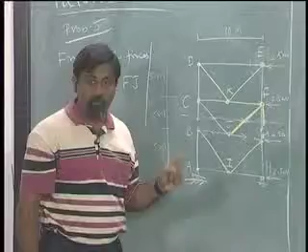So, let us try and do that. Okay, so I am going to draw this separately now.

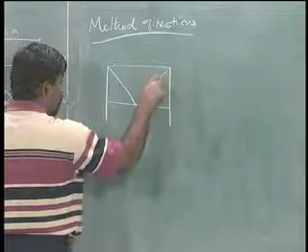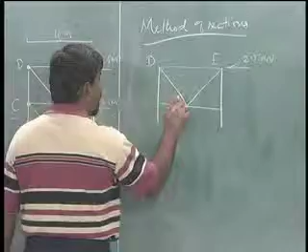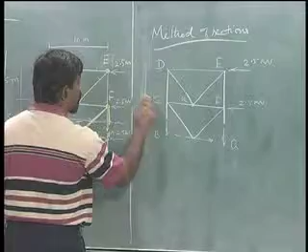This is D and E, there is a force here which is 2.5 kilonewton. This is C, K and F, this is 2.5 kilonewton. This is intact, but cut here and cut here. So there is one force here, one force like this. This point is B and this point is G. So, I have this is 5 meters, 5 meters, this is 10 meters.

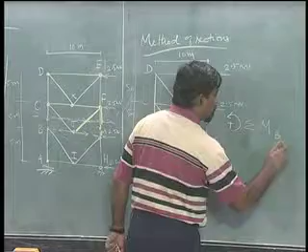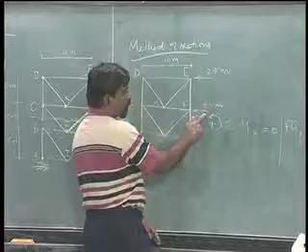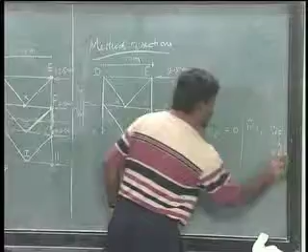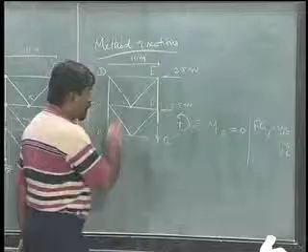So if I take moment about B, okay, let us say this is positive, it involves, let us just write down all the forces involved in this. One is Fg, the other is 2.5 kilonewton at F and 2.5 kilonewton at E, right, 2.5 kilonewton external force, 2.5 kilonewton external force. There are no other forces involved in this particular case, and therefore it is possible for me to write the equilibrium equation directly.

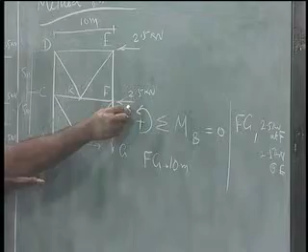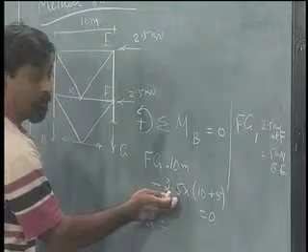About this, force is acting like this. Why is this direction like this? It is because I have sectioned it like this, away from this F the force is taken to be positive, which is nothing but the tensile force in the member, and therefore it is Fg times this lever arm, which is 10 meters, minus 2.5 into 5 and 2.5 into 10, minus 2.5 times 10 and 2.5 times 5, and thus this is equal to 0, which will give me immediately that Fg is equal to - I have to divide this by 10, which is 1.5, 2.5 times 1.5 is 3.75.

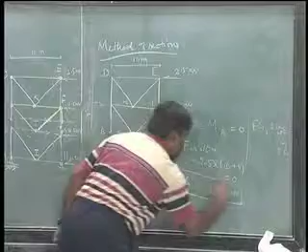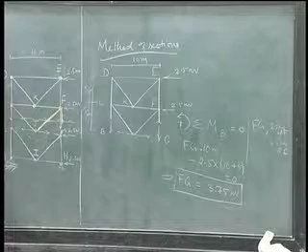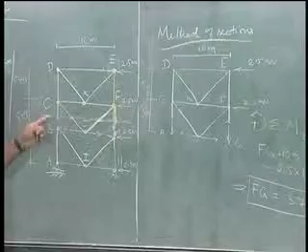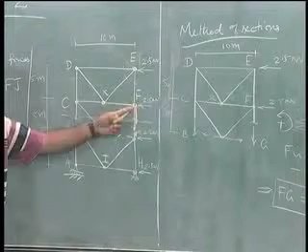Well, you may ask the question, why have you only solved for Fg, how about Fj? Is there any other way I can solve for Fj now? Now it is pretty simple. If you look at it, if I take this particular section, I took a moment about this and tried solving it. This is not exposed at all. So I have to now section in order to expose Fj.

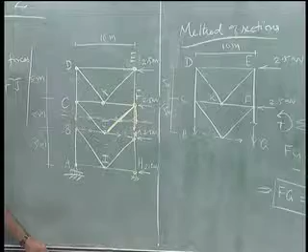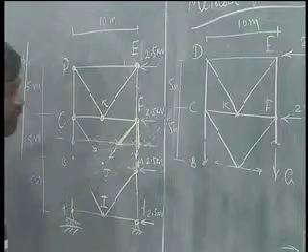We will go back to the previous way of sectioning, where we removed this also. So we have a force like this, a force like this is J. Now all these are not involved anymore. Of course this is joint B and this is joint G. So I have taken some section now. So for this, again I have 4 forces, but this force is already known.

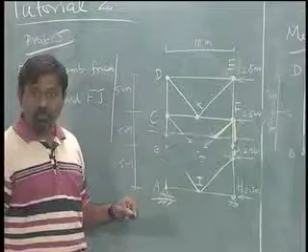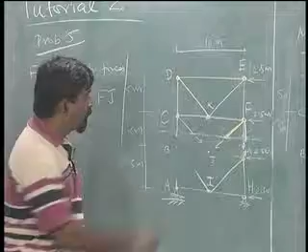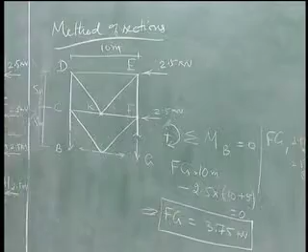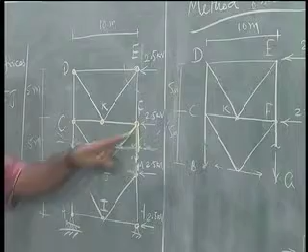If I take moment about this point, it is possible for me to directly find out this. So I will take moment about this. A moment about this will involve 2.5 kilonewton times 5 in the anti-clockwise direction. In fact, in this I should have put this to be positive. So it will involve anti-clockwise 2.5 kilonewton times 5 and Fj times the perpendicular distance. It is possible for you to find out the perpendicular distance. Once you calculate the perpendicular distance, it is pretty simple for you.

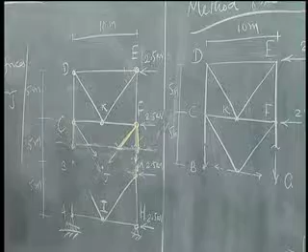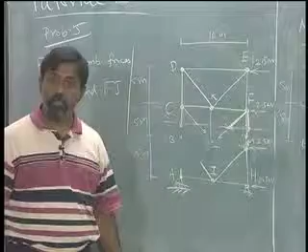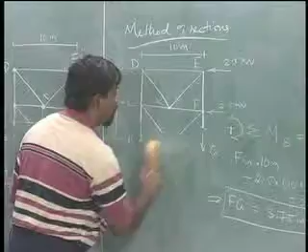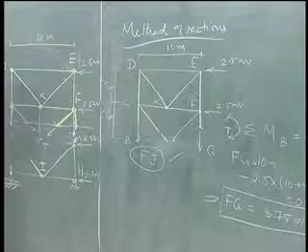In this particular case, it will happen to be, since this is 5 and this is 5, it is possible for you to immediately draw the conclusion. Is this clear? And that is how we can find out Fj. So we go for this kind of sectioning in order to solve for Fj, which is moment about C equals 0.